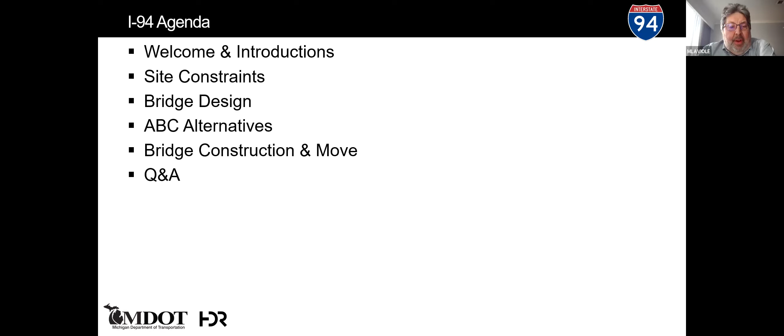I'll talk a little bit about the bridge design itself. It's a network tied arch, and we'll explain a little bit of what that means and why that's important. Matt's going to talk about some of the ABC alternatives, accelerated bridge construction alternatives that we evaluated during the design phase. And then Matt and John are going to collaborate to talk about the bridge construction itself and then the move from the staging area into its final location. And then hopefully we'll have some time for question and answer at the end.

So there's the three of us. I'm the National Bridges and Structures Practice Leader for HDR, and I was also the engineer of record for the 2nd Avenue Bridge. John is the taller gentleman standing next to me in the photo, and Matt's the one who doesn't appear to actually be on the construction site. Not sure why that is. I think he was there a lot more than either John or I, to be honest.

I took all the photos. Exactly, yeah, John was, exactly. Matt was the one taking photos, just like Dad on vacation.

So the I-94 corridor in Detroit is a system that was built in the 50s and 60s. It's in the process of being replaced over time. Some of the bridges have reached a point of deterioration where they simply won't last long enough to survive until the rest of the highway corridor is replaced in the coming years. So MDOT developed what they called an advance bridge program to replace the 8 worst bridges before the rest of the project could move forward.

We did look at the feasibility of using ABC for a number of the projects. And then because this is really a $2 billion or more corridor reconstruction project, they were looking for some type of a signature structure, something that would make sort of a visual statement to kind of highlight the project. And fortunately, the 2nd Avenue Bridge, I think, checked all of those boxes.

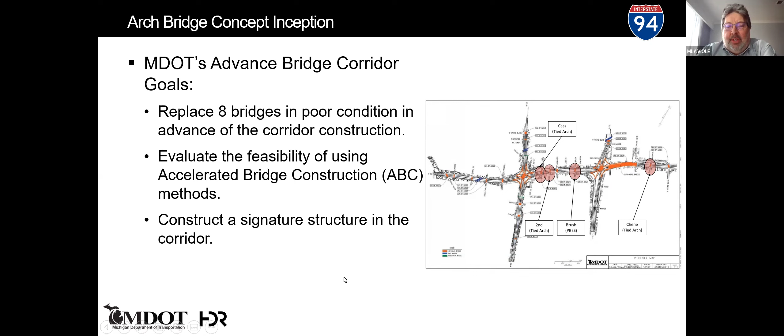When we started the project, MDOT described a couple of the most important goals. Obviously, from a practical standpoint, minimizing traffic impacts to I-94 was vitally important. This is a corridor that carries about 175,000 vehicles a day, and it's one of the main arteries into one of the major cities in North America. So it was very important to minimize traffic impacts.

And they also wanted to minimize the need for any throwaway work, any type of temporary construction that would be built today and then demolished in the future. The reason I say that is in the future, the entire I-94 corridor is going to be widened and shifted about 40 feet north of where it currently is to better suit the alignment. So we looked at a variety of conventional bridge structures at the beginning that would have a pier constructed in the median today, and then shifted to the new median at some point in the future, meaning you'd have to demolish the pier that was just constructed a few years earlier. So that was something that was immediately set aside.

The bridge itself is located right in the middle of the Wayne State University community. So there's students on either side of the highway that need to get back and forth from their living accommodations to campus. It was very important for them to have a safe and attractive pathway to get to campus. I brought in a lot of stakeholder involvement, not only from the university community, but the city of Detroit. Anytime you've got a modern structure, and especially near a university campus, having pedestrian and bicycle access is going to be very important.

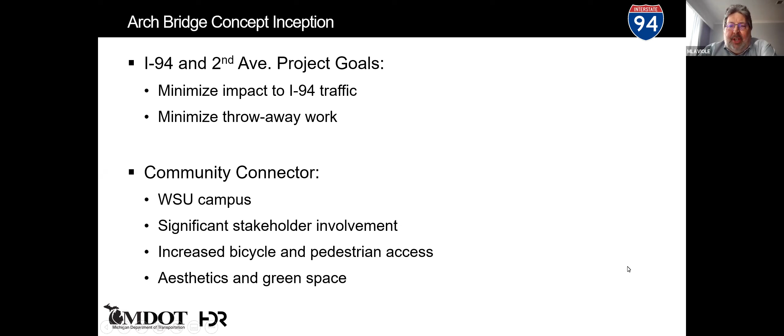And the city was really looking for a park-like type environment. It was almost treated like a park that would happen to carry a few cars and trucks every once in a while. So that's what we were looking for, a somewhat wider structure and something that was open to the sky. They really liked the idea of eliminating lateral bracing between the arch ribs. That had not only an appeal from a visual and an experience standpoint, but it was also very practical, and we'll talk about that in a minute.

So the bridge itself has separated lanes for vehicles, bicycles, and pedestrians on the sidewalk with green space, planter boxes, landscape medians. Like I said, basically a park that happens to carry a few cars once in a while.

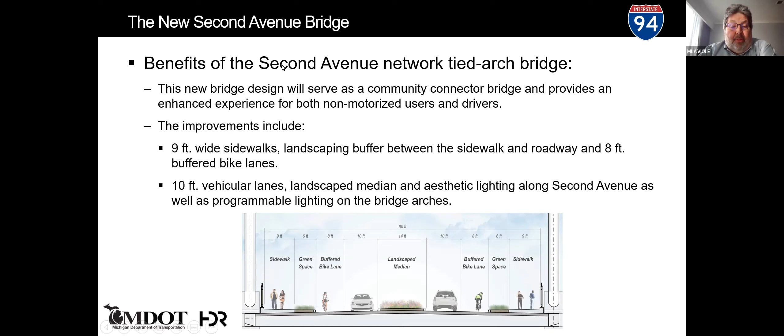I mentioned that the highway is going to be widened in the future. One of the things that we felt was really important was having a clear span bridge that eliminates that center pier altogether. We also needed a way to build a shallower structure that would reduce the need to raise the profile to maintain vertical clearance over I-94.

So that would reduce impacts to the surrounding streets on either end of the bridge. There's a historic property that I'll explain here in just a minute why that's important. And we did look at some ideas for using self-propelled modular transporters to move the bridge into place, and we'll talk about why and how that was done later on.

So an early rendering of the project, you can see the bridge itself, some of the landscaping ideas, and you can compare that to the existing bridge or the original bridge that was there when we started construction. This parking garage to the right-hand side, that's going to be very important, and we'll talk about that too.

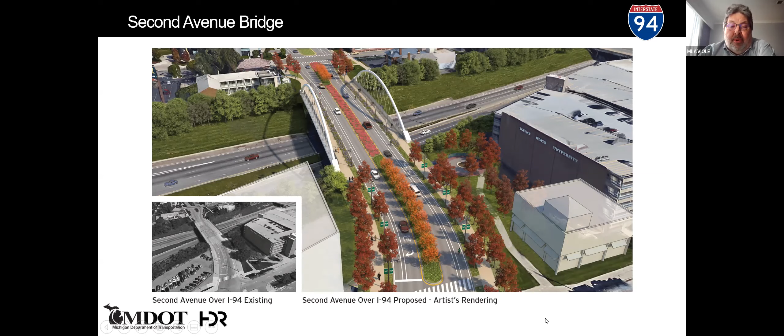This is an old motel that was significant, and then there's a building right here that was a very important historic artifact in the city of Detroit. It's a historic recording studio that was basically the foundations of Motown music. And to the city of Detroit, that is a very, very important historical landmark, and that could not be touched during the design. So that really impacted a lot of the alternatives we had for constructing the bridge.

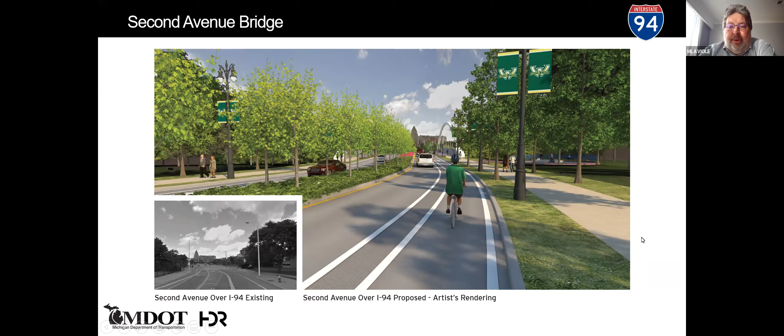As I said, the bridge is a skewed, unbraced network tied arch. So what that means, if you look in plan view, the bridge deck is not a rectangle. It's got two acute corners, two obtuse corners, and the whole idea for skewing the bridge was to accommodate the frontage roads on either end of the bridge and the adjacent properties.

Instead of being vertical hangers, as has traditionally been done with a tied arch bridge, these are crossed diagonally. And there's some real structural advantages to that system, basically providing additional redundancy and stiffness and allowing us to reduce the depth of the structure even more.

And when we talk about a tied arch, what we're saying is that the deck itself serves as a tie. It keeps the ends of the arch ribs from spreading apart laterally as the deck is loaded, as the vehicles pass over the bridge. So that's a big advantage from a structural standpoint.

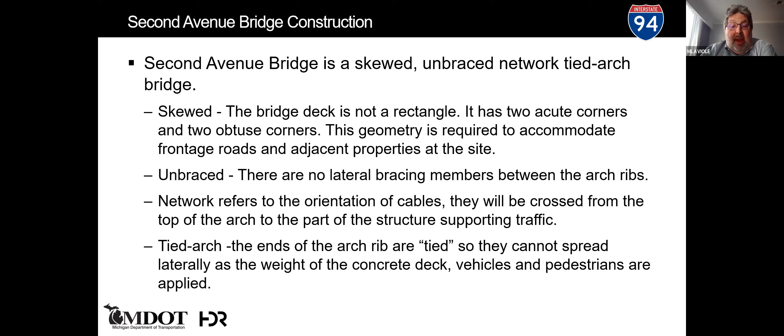But the other thing it does, it allows the entire bridge superstructure to be freestanding. So we can build the bridge in one location, pick it up and move it to another location, and it remains completely rigid and self-supporting.

So the project site, like I said, is in downtown Detroit, with the Wayne State University campus on the lower side of I-94. This is that parking garage I was talking about a minute ago. That historic recording studio, you can see, is right near the corner of the bridge. So that really dictated not only the bridge alignment, but also how the bridge would be constructed.

And the bridge is actually much bigger than the existing corridor, much longer than the existing corridor was. So there really wasn't a great way to build the bridge in place. We looked at different possibilities of building the bridge somewhere else and moving it into place. And really the only feasible place to build the structure is in this parking lot area, what we're calling a staging area. It was a university parking lot.

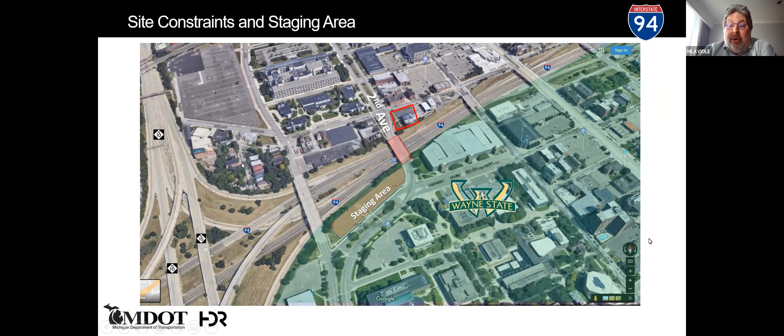Wayne State is largely a commuter school, so there's an awful lot of students that park, and faculty members too, park there during the day.

The I-94 corridor, as I said, was built in the 50s and early 60s. It's a depressed freeway for a large portion of the corridor, with a very low vertical clearance. In our case, about 14.5 feet of vertical clearance over I-94. You can see evidence on the previous bridge of numerous overhead vehicle strikes. And so that was one of the other design considerations, a structure that could be resilient to these types of vehicle strikes and repairable if it was to be struck in the future.

The other challenge to the site is a 3 to 4 foot grade difference between eastbound and westbound I-94. And the reason that's important is if you're thinking about trying to roll the bridge across from one side of the freeway to the other, now you have to do something to accommodate that elevation difference.

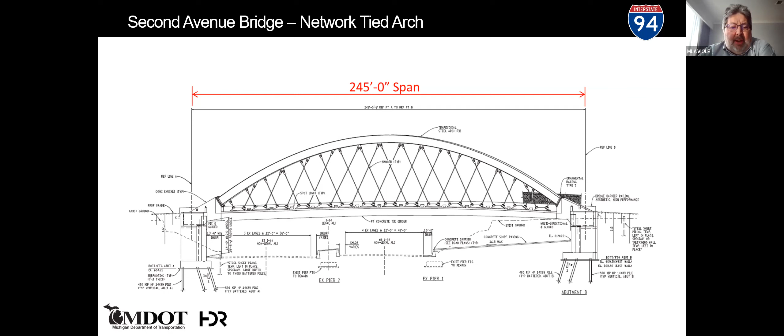So the solution we came up with is a 245-foot span network tied arch. You can see the diagonal hangers, indicating a network type structure. The tie itself is not just the deck, it's the post-tension concrete tie girders that connect the two ends of the arch ribs together.

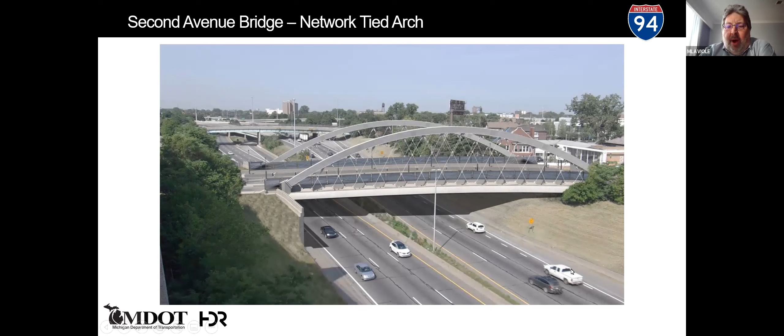That's a rendering of the bridge prior to construction, and you can see why it looks a little bit longer than would make sense for the current alignment of the freeway. That's all because of the future widening and alignment shift that'll take place down the road.

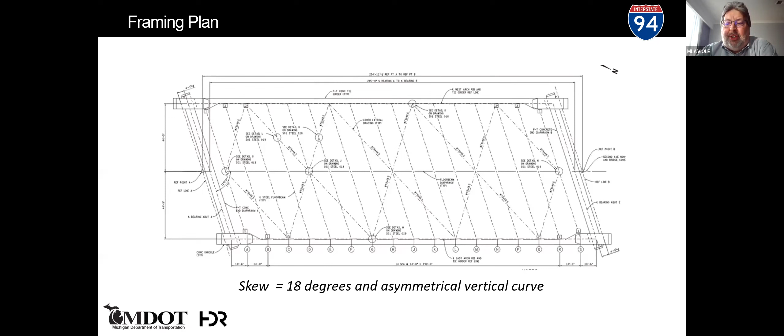Skewed 18 degrees. That in itself is not a big challenge for a conventional bridge, but it does complicate the details quite a bit for a tied arch type structure. The other thing we had was an asymmetrical vertical curve, meaning every single floor beam on the structure had to be slightly different, because the skew and the vertical curve worked together so that all the elevations were different from one side of each floor beam to the other.

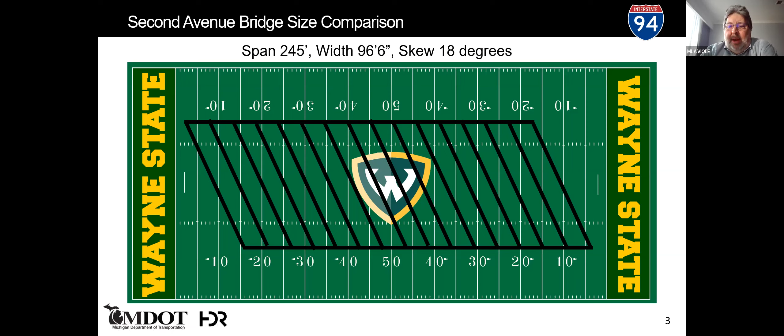Just to give you a sense of how big the bridge is, here it is overlaid on top of a football field, roughly 2/3 the size of a football field. It's always easier to recognize the scale of these types of projects when you can lay it on something to compare it to size-wise.

So why is a network arch such an improvement over a conventional tied arch? It's much more efficient than a traditional tied arch bridge. The incline hangers really reduce the moment and shear forces in both the tie girder and the arch rib.

That allows us to make the hangers, the tie girder, and the arch ribs much, much smaller, more efficient, and quite honestly, more visually attractive as well. They also provide additional redundancy to the overall system.

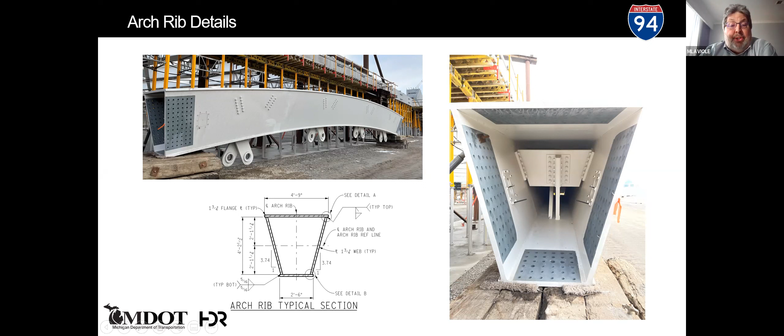The hangers themselves are 3 1/8 inch diameter structural strand, galvanized. Initially, we looked at galvanizing the entire structure during the design phase. After some testing at MDOT headquarters in their materials lab, we decided it was actually better to go with a very reliable and predictable paint system.

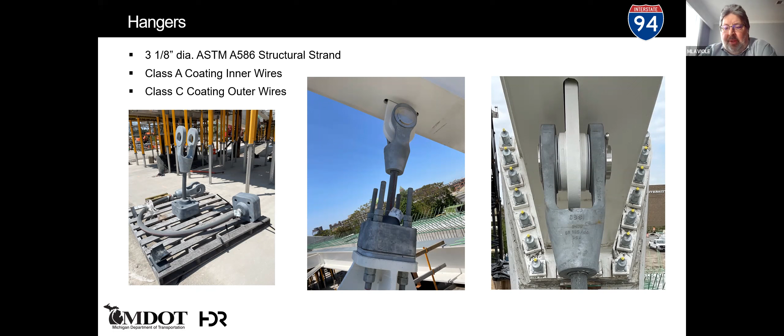We had some concerns about the potential for bolts and those internal components being loosened by the hot dip galvanizing process. So at that point, we just went with a painted system that everyone was comfortable with, and that MDOT had used with great success in the past.

As I said, the post-tensioning system, both the tie girders and the end diaphragms are made with post-tension concrete. Really, the only reason those arch ribs can remain vertical without lateral bracing between them is the post-tension end diaphragms. That's where that lateral stiffness comes from in the system.

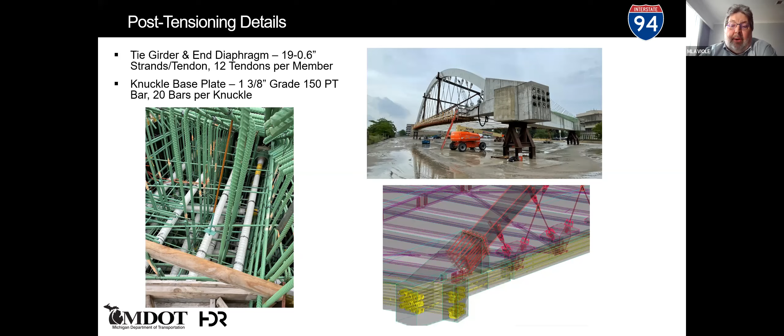All right, and with that, I'm going to pass it over to Matt to talk about the construction process.

All right, well, thank you, Mike. Here, I'm just going to get this up.

So as you can imagine, very complicated bridge. The construction engineering is a very significant part of the project. So let's talk a little bit about that. This happened during the design phase as well, but it all ties together.

Just some of the ABC alternatives that were considered. Building it off site and being above the freeway, above grade, really made sense to do an SPMT move. So we looked at doing three different options: you build the whole superstructure, move the whole thing into place all at once, deck, all the superimposed dead load.

The downside is that it makes it really heavy. So kind of the in between there is you could build a skeleton, and this is what we ended up doing. Get the floor beams, arch rib, tie girder, diaphragm, not the deck, and then move that, and really just kind of help save the weight.

Or there was another kind of out of left field idea, trying to do panels where you could do one arch and rib and tie girder segment, and not do the other, and then bring in the floor system and things. Didn't end up going that way.

And I should probably take a step back too. All these were using SPMTs, and for those who don't know, it rolls right off the tongue for us - self-propelled modular transporters. They're more or less a bunch of linked hydraulic axles. They can move incredibly large amounts of weight. These things get used all over the world for some really unique projects, not just in the transportation industry, but other industries as well.

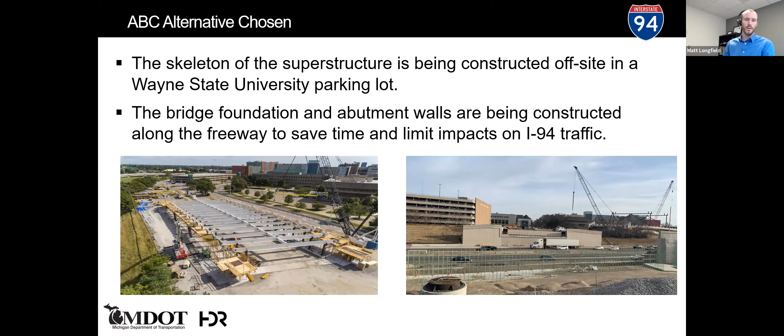Now, obviously, any signature bridge, as you can imagine, sometimes in the life and times of a bridge, as one of my professors used to say, the most critical time in that life is early on in construction. Depending on the configuration and how things go, that could be the most critical load that bridge will ever see. So certainly something that wanted to be accounted for during the design.

And how are you going to do this? This is pretty unique work. So to not be that engineer who thinks they know everything about construction, there was a lot of one-on-one confidential meetings with the different heavy movers around the country and the world, really. Just to see how they would do it - how would they pick up the structure, where would they pick it up - those types of questions.

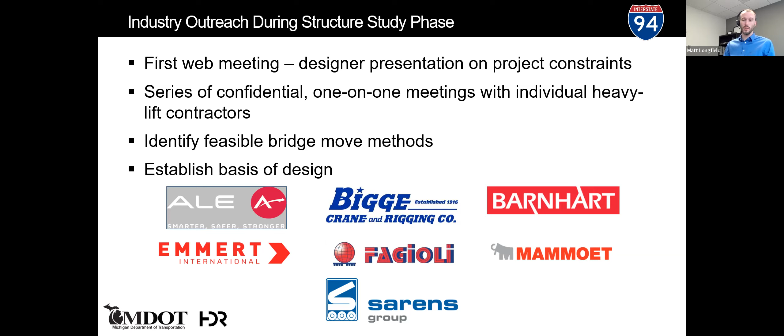And a scheme was come up with during the design phase that at least two of each of the movers could do, just to make sure that the bids would stay competitive. And then this was used to estimate any locked-in stresses from the construction phase.

So this sequence that was come up with during the design phase involved picking up the arch, the whole superstructure skeleton, from the arch itself, kind of inboard of the knuckles. They used temporary end diaphragms in this configuration to keep the weight down, and it would pick it up - called that the handbag configuration - and then at that point drive it over to I-94, where it could just be set down onto a tower that would be supported by other SPMTs to then carry it the rest of the way across the freeway.

And because this was not maybe the most ideal way to lift up a structure, it did drive a lot of the permanent geometry, particularly just trying to keep the member sizes as small as possible, really just trying to keep that weight down. Of course, knowing that the contractor could likely come up with another way to do this, a very detailed special provision was developed requiring the contractor to have an erection engineer and their own analysis and procedures, really backing up everything that they'd proposed to do.

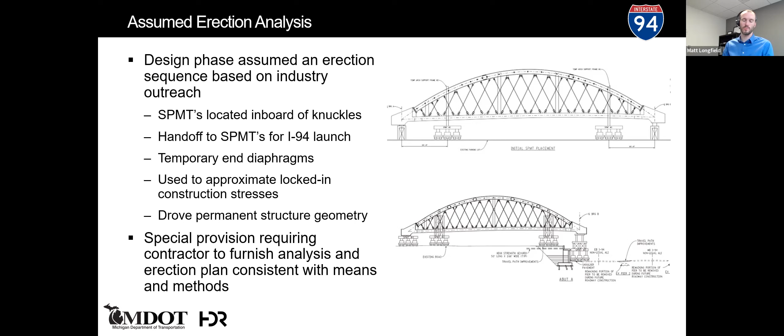And kind of as expected, they came up with something a little different, not terribly different, but a little different. The main change really came from: they didn't want to support the superstructure off of the arch, but they wanted to pick it up right underneath the knuckle, right under the centerline bearings for the permanent condition, which structurally that's great. It actually even allowed those end diaphragms to get poured ahead of time, which is good for minimizing impacts to traffic on I-94.

Really, I'd say the complication of this method came from how do you make that handoff? Now, you guys can see my mouse pointer here - if you look right here in this picture, this is called the skid shoe that Mammoet uses. And basically what they ended up having to do when they drove the bridge up to the freeway, they then had to slide it, or skid it, on a track over the abutment to pass it on to the tower supported by SPMTs on I-94.

To then drive the rest of the way across, and then skid it again one more time back onto the abutments before it could be lowered. So for those playing the accelerated bridge construction game at home, not only did we have an SPMT move, but we also had a slide.

So we're claiming some bonus points on that one.

One thing I like to note too is the erection plans, calculations, and all the information that went into this procedure was about 1,700 pages. Anyone who's run structural software knows, oh, that's nothing, I can print out 5,000 pages out of Larsa, no big deal. But this was actually 1,700 pages of the pared down version. This was all very relevant information that had to get reviewed, not just pages and pages of computer output. So it was quite an effort to do that.

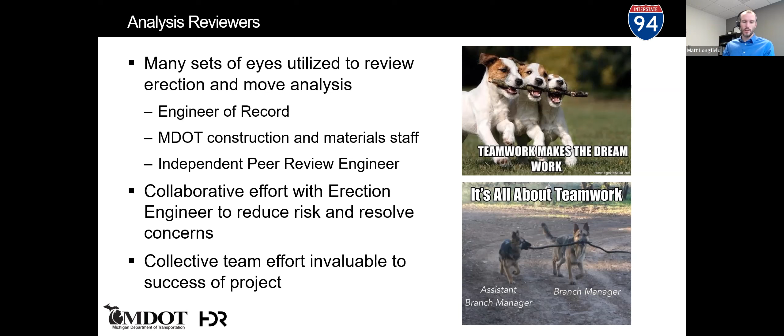And in order to do that, it took more than one person, obviously. HDR was the engineer of record for the superstructure, and we were very involved in reviewing it. MDOT and their different construction and material staff were also very involved. And there actually was an independent peer review engineer, Parsons, brought on. I'll give them a lot of credit, they did a great job helping everyone out, bringing some good outside perspective to the project. Everyone worked together with the erection engineer to really sort everything out. If anyone had a question or thought they saw any risk, we got everyone on the phone and talked about it. A lot of smart people on the team's call, I guess you could say. But the teamwork really was invaluable. We may have sung Kumbaya once or twice, but it really was a highlight of the project, and just from a career standpoint, getting to work with some top-notch engineers from several different places.

As part of this, in construction we developed 3 independent finite element models between HDR, Jansen as the erection engineer, and Parsons as the QA engineer. The HDR one, obviously we had from the design phase, which we then updated for the contractor's means and methods. And we had regular team meetings to hash out differences in the modeling and just compare notes.

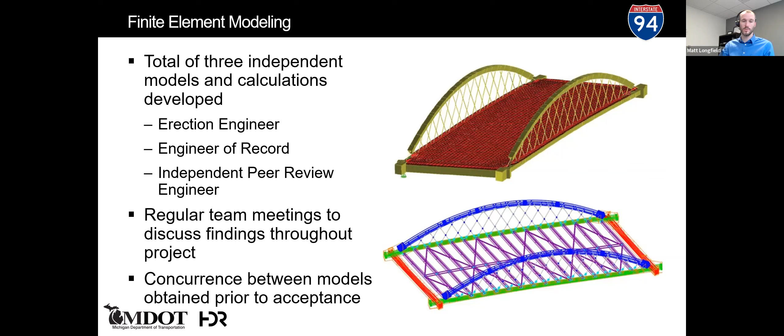There was discussion too about the technique, like where did you put that imperfection in your arch to get it to buckle, or the knuckles, how did you model the knuckles? That was a lot of conversation, actually. Did you use one massive, really stiff concrete member, or did you use some smaller but still stiff concrete members connected by rigid links? Everyone being engineers kind of went their own way with it, but at the end of the day, there was concurrence between all 3 models that the bridge was going to be okay. And that gave the warm and fuzzies to a lot of people on the team, knowing everyone came to that same conclusion.

To be engineers and continue to cross the T's and dot the I's, prior to the move we wanted this thing planned out to the letter. There's another document, not quite as long as that first one, but really detailed everything about the move and the procedure, each step by step. Who's the superintendent and operators on site for the contractor, here's their phone number so you can call them, drawings, calculations, a lot of detail on a monitoring plan, which I'm going to talk about on the next slide. We even all got together 1 month ahead of time at the Detroit TSC, their regional office in that area, and really walked it through, who's going to do what, how's this going to happen. It was really valuable because we did shake out some loose ends during that meeting, and it took all day, it wasn't a 1-hour call.

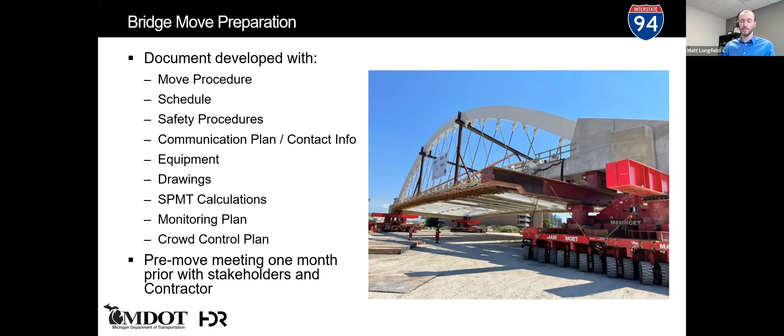One thing I do like to mention too, in terms of accelerated bridge construction, very early on in the construction phase, the contractor did have a VECP concept that they wanted. It ultimately was not accepted, though it's worth mentioning because it was a really good example of some outside the box thinking. Instead of doing the move, they wanted to build the bridge superstructure in place over I-94. However, to avoid the traffic impacts, particularly forming and curing that tie girder, they wanted to use precast segments and post-tension them together. Ultimately this was not accepted, it was a lot of redesign and a lot of shifting of liability and risk to the contractor and away from MDOT and HDR as engineer of record. But again, it was a neat concept. Theoretically speaking, and it didn't get vetted all the way through, but it would have been about the same week-long closures on I-94 that it also took to do the move.

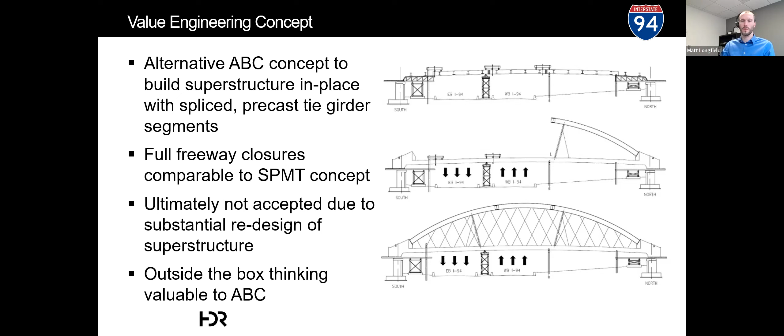I want to also touch on the monitoring during the move. This was a very critical thing. We've got a several million dollar bridge, 5 million pounds, and we're going to move it. We really want to make sure we don't break it. That'd just be bad for everyone involved.

It was agreed through the whole project team that the worst thing that could possibly happen to this bridge is that one corner would get out of plane relative to the other corners, whether the hydraulics failed and it settled, or it went over a bump or something. That twisting of the superstructure is really what we were trying to avoid doing.

The bridge was designed for up to 3 inches of out of plane movement at any one of those corners, and things would be okay. So as part of the monitoring, they established what I call green, yellow, red light values. Relative to that settlement or out of plane movement on any corner, 3 inches would have been the red light - all stop, we've got to make an adjustment.

2 inches was that yellow light - you're getting close, you probably should make an adjustment at this point. Based on those limits, we also, out of the models, were able to check not just the 2 corners, but if you took that model and dropped one of them, saw how the structure deflected - that's how the relative distance measurements between the nodes were developed.

All right, there we go. Can you hear me, Matt? All right, you're muted, but I saw your lips move, and I'm assuming we're on the right screen now. Yeah, looks good, John. All right, good afternoon, guys.

So yeah, we're going to walk through the construction process. We're going to keep it pretty limited on the overall construction process, as it ended up taking us 3 years, which is 2 years longer than we anticipated. Our therapists have said it's best not to talk about it to make us feel better about ourselves.

So we're going to just get into construction. This is early on in the construction phase, but the first question is, what do you do with a 5 million pound structure in a parking lot? Because it clearly can't sit on grade, and at some point we have to be able to get underneath it with SPMTs. So the first stage here was to put in basically temporary abutments.

Each of those A-frames in the 4 corners under the knuckles are sitting on driven pile. The rest of those supports are actually for the floor beams, and those are just sitting on reinforced concrete slab.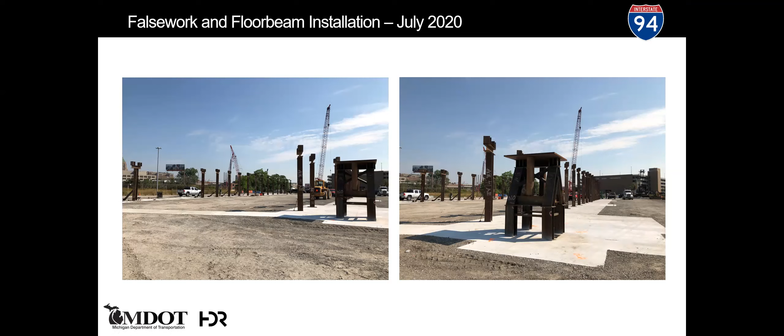One of the trademarks of this project is every step of the way something was a hiccup. These beams arrived on site before we realized each of those hanger plates, that's supposed to be at a very unique special angle due to the geometry of the bridge and the angle of the hangers coming in, was actually wrong.

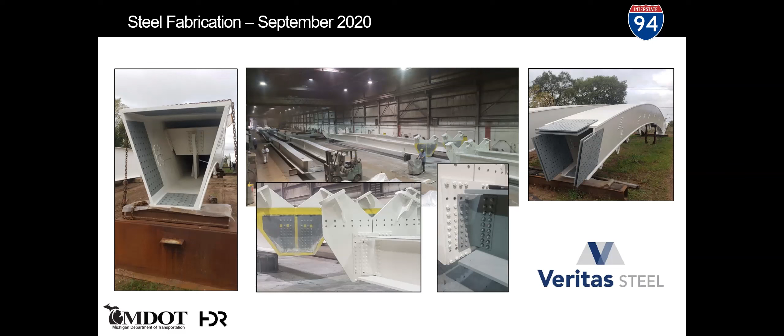They were all fabricated on a flat surface, and so all but a couple of the beams actually had to make a trip back to Wisconsin to have all those bent plates there that you can see in the lower picture in the middle. The connector plates all had to be rebent, and everything had to be reshaped and then sent back to Michigan to get re-erected.

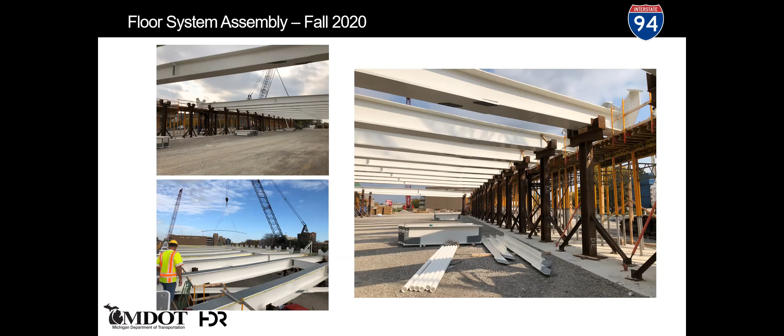So basically a bunch of really custom oak wood blocks. Obviously, one of the big things we learned going into this project was that 8,000 PSI mass pour concrete that had to act like self-consolidating concrete, but couldn't be self-consolidating, was going to give us a bit of a headache. So we decided to put a mock-up in the plans.

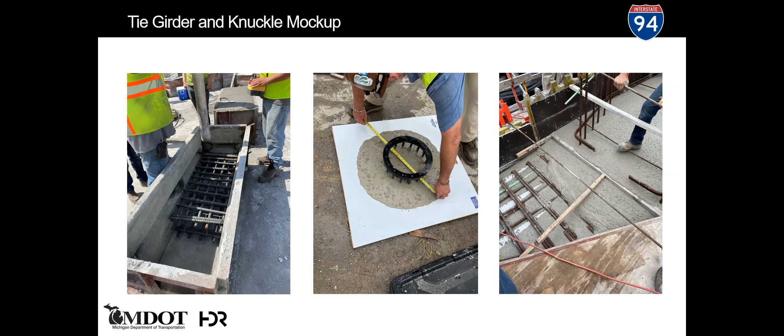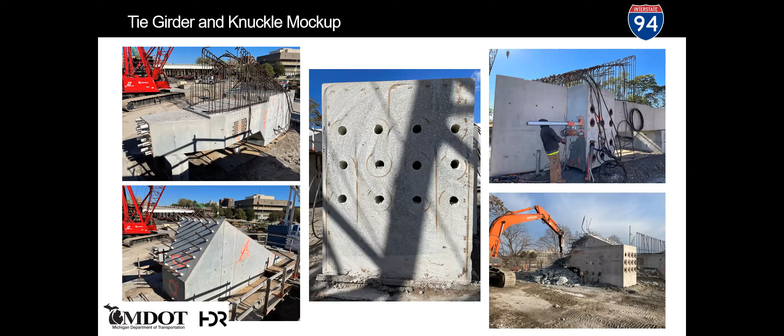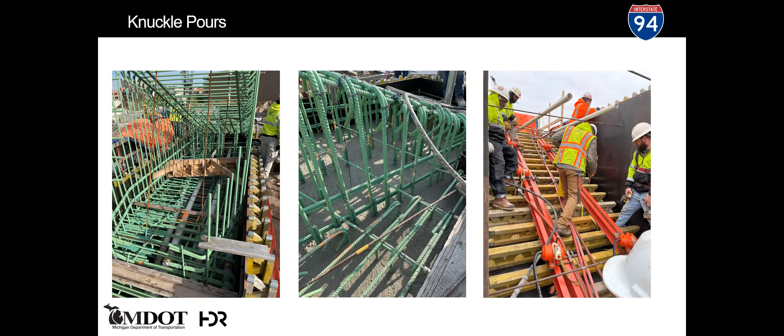So we ended up using a fabric material that our project down the road at the Gordie Howe International Bridge had found to help them with their slope faces. It basically wicks the water away from the surface, which gave us a better finish. We were able to successfully finish 3 of the 4 knuckles. We still had problems with one of them with a blowout, so we had to do some significant grinding and patching on that one.

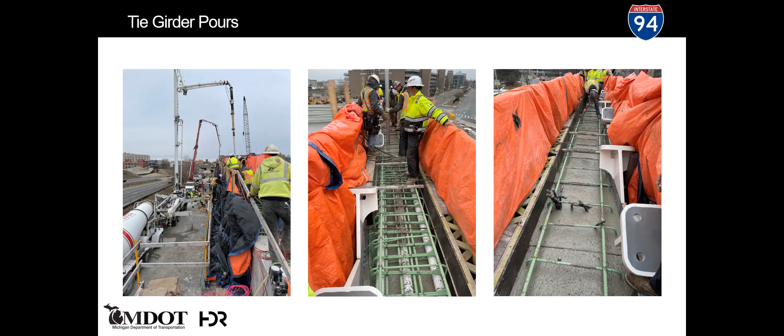We ended up taking the paint right off the top of the arch as it started to slip at about 16 feet off the ground. So we convened. We had a lot of billable hours for a lot of really smart engineers, and after thousands of dollars in engineering fees, we came up with a couple hundred dollar green strap and a bottle jack. And ta-da, we have positive connection, and now we can erect the arch without it slipping through our hangers.

Obviously, then we have to set the crown pieces. Again, because of our tight spacing, we really could have used a third crane to manipulate this process, and unfortunately we only had room for two. So it became yet another unique step in the process that took way longer than we probably should have. But we really did manage to get that crown piece in place.

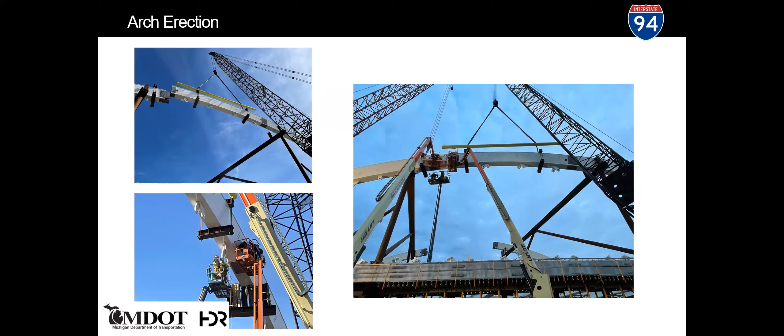As Matt showed you that arch earlier, there is no room for a person to get through there, but yet someone did. I don't know where they found this gentleman, but he managed to squeeze through there to get inside to work on some stuff, and then crawled his way back out of the crown piece. So kudos to him.

Here we are setting the last of the two crown pieces. As you can see from that parking structure Mike pointed out, we get some great photos from up there. The bridge is in place, the arches are in place.

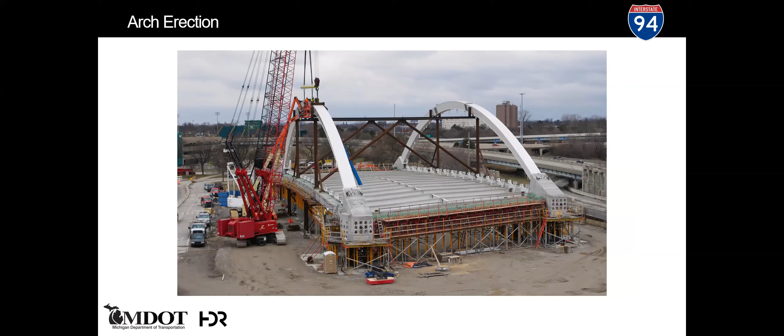We have one duct at this point in each tie girder post-tensioned to compensate for the load applied by the arch. But now we're going to have to go ahead and post-tension the rest of stage one so that we can get those tie girders to take off and the hangers to fit.

So we went into post-tensioning here. The original design had 12 ducts, 6 for load, 6 for potential future usage if we had an impact of some sort or something like that. Unfortunately, we turned this bridge into 90 feet wide for 20 feet of roadway with 2 raised sidewalks, 2 bike paths, 3 raised planter boxes, and a partridge in a pear tree. At the end of the day, we ended up using all 12 ducts. So the remaining 5 ducts of stage one were done.

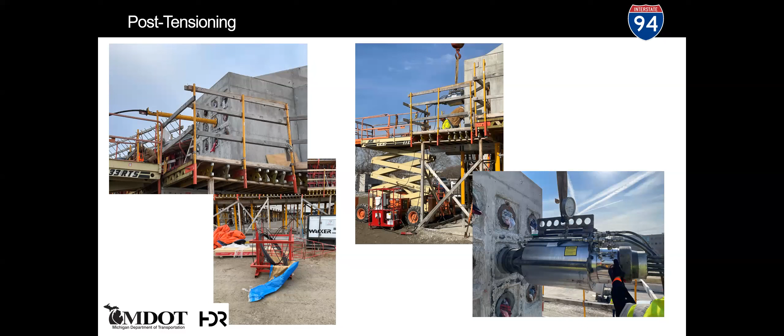We actually did another mock-up here. It's quite common, if you haven't done any large-scale post-tensioning, to do a mock-up, and a lot of contractors try to talk their way out of it because it's not needed, we're really good. Luckily, the department stuck to our guns and insisted they do the mock-up there on the left, and it paid off because we found some possible places we needed to check, and we were able to change the process for burping and all that of each of the ducts to get it to consolidate correctly. In the middle you can see the grout mixers, and on the right are some of the tests we're running and overflow to make sure we get all the air out of the ducts.

All right, so then comes hanger installation. Each of these hangers, if I remember correctly, the upper socket is just under 400 pounds, the lower socket is just under 500 pounds, and the cable weighs in at 20 pounds per lineal foot.

So even the really short one wasn't exactly maneuverable, so we had to bring in the contractor. CBSI did a fantastic job. They came up with these custom Cs on the left, you see, to allow the crane to reach around the arch to start installing the cables.

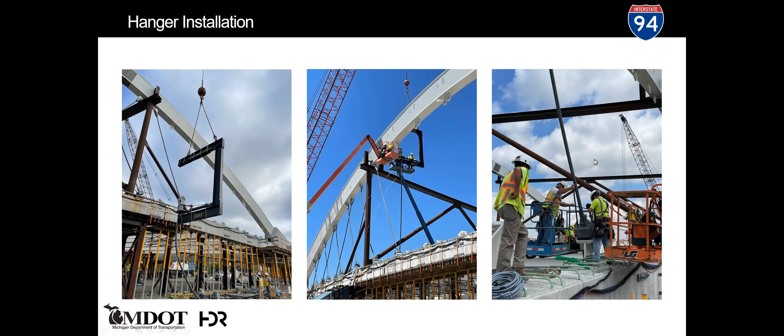It took us a couple of weeks to get them all in. But once they're in, it's time to actually get them to fit and put the load in them. We needed an initial load of 120 kips per cable, so we got 2 60-ton jacks right there on the 2 opposite corners. You can see us putting in shim stacks there.

A valuable lesson we learned here is your lower hanger needs to be milled, not cast, so it's a nice smooth surface. And honestly, if you hot dip galvanize 1/8 inch and 16th inch shims, you're going to end up with potato chips that just don't fit in straight. So we had a lot of hand custom making of shims. There were some very colorful words used, and just a good old time for a few weeks of fighting to get each and every one of these right where we wanted it.

To make matters even worse, the bridge has to stay balanced the entire time. So we had 2 crews. Matt and I were basically running one side with the foreman on the other side of the structure, working in tandem and making sure nobody got too far ahead of each other, working to get the initial spacing needed per the construction engineer's calculations.

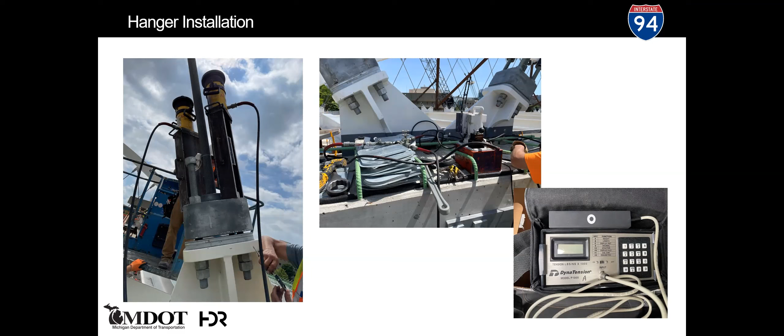So good times, this was a lot more fun. This picture here is in June and July. It's way more fun to do this in June and July than when we did the post verification, which took place in December. And in Michigan, December is not pretty.

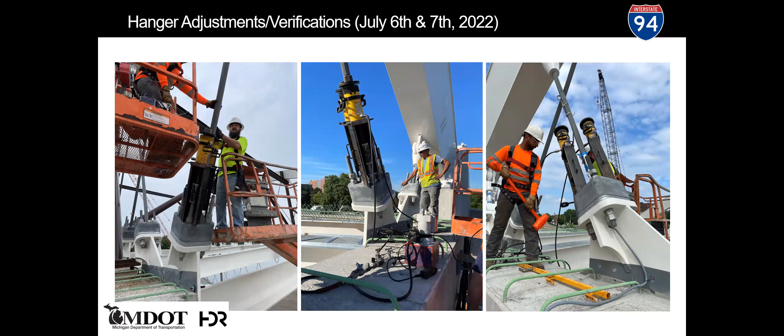So here's the main three guys that did all the yeoman's work on this. On the left is Greg, our carpenter. In the middle is our foreman, Pat. And on the right is our laborer, Diego, who right after this job was finished decided to join HNTB as a construction inspector, because I think he'd had enough building bridges.

All right, so let's get to the move, the good part. On July 6th through the 8th, we were finishing up the hangers, and the contractor said over the course of a week, 77 semis were going to arrive with equipment. Unfortunately, they all converged on downtown Detroit the same day, which obviously is not great for Detroit traffic or our project site, but we had to shuffle through it. It took us 3 days to shuffle through 77 semis worth of equipment just to move the bridge.

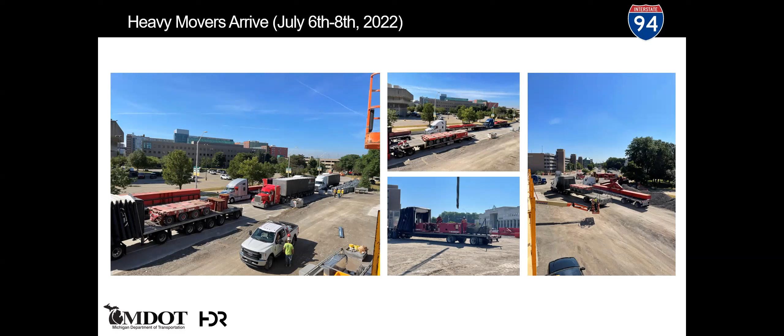So first process in the move is these A-frames, these temporary abutments that have been in place for 3 years, and we need to park an SPMT right where they're at. So how do we get that out of there to the picture on the right where we just set it next to the dumpster to be recycled?

Well, that's where these carrier beams that Matt showed you earlier come into play. They allow us to put the load front and back of the knuckle, and then using walking jacks on the side, we can lift the structure. It actually had to be elevated 16 feet in the air to be able to get the SPMTs under it. And we're obviously not at that height yet, so how do we do that?

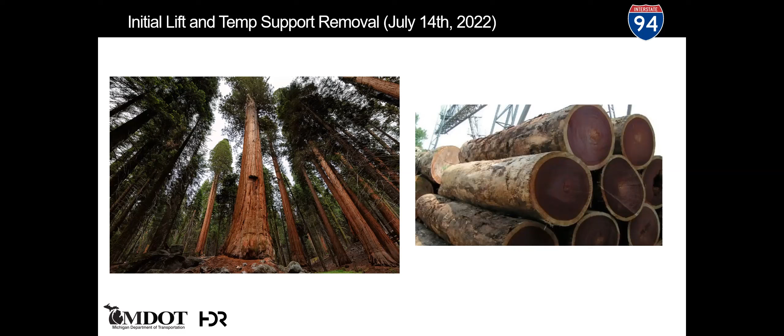Trees, lots and lots of trees. This is African azobe wood. It's considered an endangered species now, not at the time the blocks were made. It can handle, I believe, 17 tons per square inch. And they store it in oil to help it stay preserved, because as an endangered species, they're not going to be able to go get more of it anytime soon.

This is what it looks like when it arrives on our job site. I believe we ended up having maybe 2.5 flatbed semis full of those crates for all the blocks, because each corner needed a significant amount of lumber.

You can actually tell from the Jenga blocks on the right, the darker ones with the red ends, that's the African azobe. The other ones are a new material they're using, a bamboo epoxy hybrid, the green lighter colored ones.

They kept telling us not to touch the azobe without gloves on. I asked if the wood was really that hard to get a splinter out of, and their answer was no. The chemicals we stored it in to keep it preserved will kill you if you get it in your skin before we can get you to the hospital. So you probably don't want that stuff in your body.

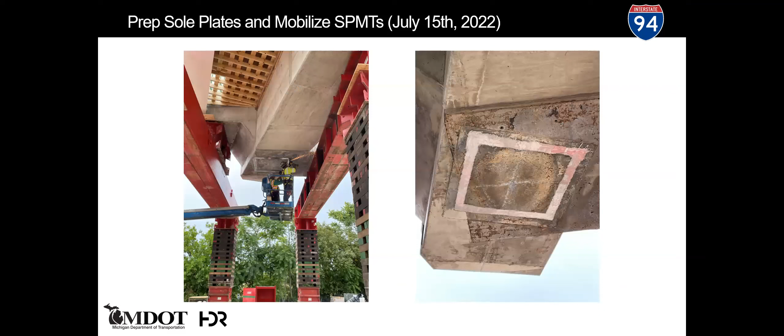Once we got them up in the air, we got the A-frames cut out. It dawned on us this is the first time we've seen the sole plates in 3 years, and the last time we're going to see them with any room to work on them ever again. So the contractor decided to take this opportunity to grind off the galvanizing so we could weld the bearings in place. Again, everything on a structure of this size is multiplied in time.

Contractor thought it'd be an hour for their crew to take all 4 plates out, and after a few hours on the first plate, they still had 11 mils of galvanizing to get rid of. So we were there for an entire day with multiple crews just to get that small area ground out.

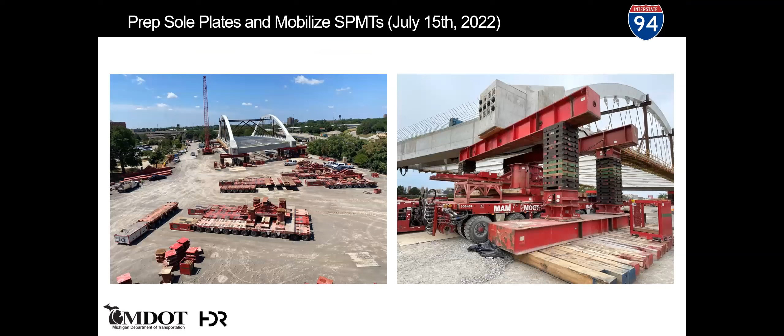Here we are on the 15th. We are now ready, and the SPMTs are to pull in there.

This is just a great picture from that parking structure. During the initial design, original estimates for the weight of the structure called for probably 80 lines of SPMTs. By the time we got the numbers refined, we were up to 96. At the end of the day, for stability and things like that, we ended up using 120 lines of SPMTs, which means Mammoet was the only company in North America that could actually handle this work without having to borrow equipment from other contractors. That tells you the sheer magnitude of what we were doing here.

So there you can see all the SPMTs getting assembled at that point. It's just a great picture to show you how much equipment we needed. On the right, you can see them pulling into each of the 4 corners, preparing to be loaded.

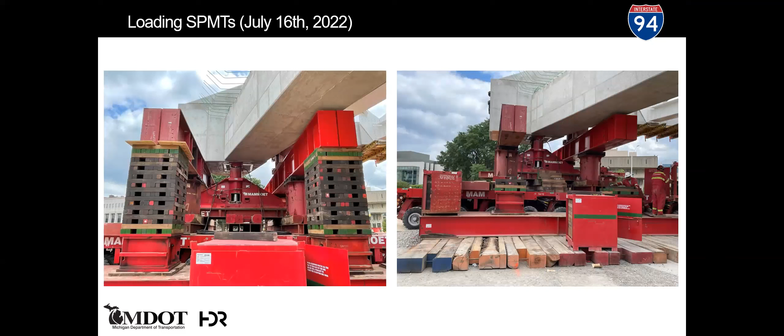So on the 16th, this is when we loaded the SPMTs. We actually began to play Jenga in reverse and slowly walked them down until they were loaded on each of the shoes.

Now, technically, each shoe has enough force in the 2 jacks inside of it to actually handle each corner on their own. However, we did have a stability question come up during design: is the shoe going to be able to handle the amount of force implied on it for braking, and also stability making the turn to the abutment? Eddie He from Parsons, a very brilliant man, asked a very brilliant question, and the response we got from the contractor when we asked how the shoe works was, 'it just does.' As you can imagine, engineers, 'it just does' is not really a calculatable answer.

So once again we compiled a group of engineers and came up with the idea of the carrier beams. These carrier beams were no longer just for the initial lift, they were going to make the ride with us. At which point we then figured we better get them tied down.

So on the 16th, we spent the rest of the day putting on chains, come-alongs, pulleys. I think we went and got every chain in the Metro Detroit area to tie this together to make it as stout as possible. We also had to realize that the rear carrier beams on the front abutments, the north abutments or north knuckles, were not going to be able to make the trip or be removed and replaced. They were going to have to make the trip with the bridge.

So the picture on the right, there we are with chains and pulleys, and we are actually anchoring those to the knuckles so that they can make the transfer with the bridge.

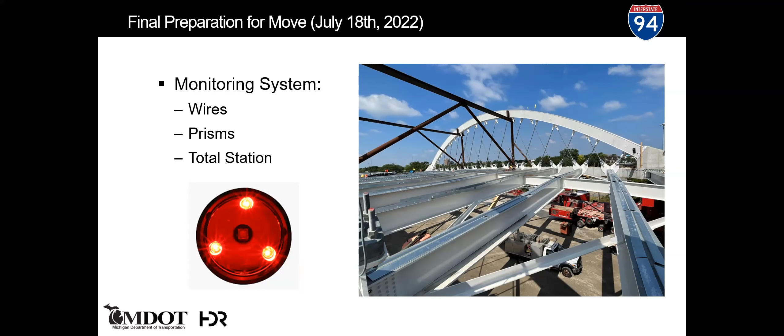So Matt brought up the monitoring system. As you can see in the picture on the right, believe it or not, that monitoring system is fully installed. And if you're asking yourself, I don't see any wires, well neither did we, and that's why we tripped over them and broke them quite a few times. But most importantly is that little red light. That little red light had more billable hours during the move than anything else, as a group of grown men and women, engineers from some of the most intelligent in the entire country, spent the entire move staring up like turkeys looking into the rain, waiting for the little red light to go off, where we all screamed, stop.

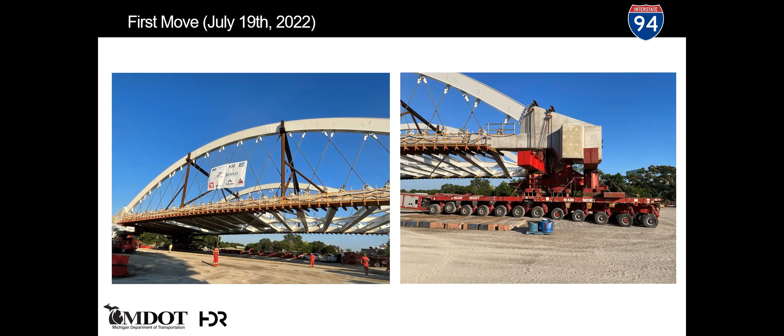So the first move began on July 19th. Now moving a 5 million pound bridge is just another day at the old work site. But for the entire Michigan Department of Transportation and all of our consultants and contractors and the people who've seen this thing sitting there for multiple years, wondering when it was ever going to move, we were very, very excited. We were so excited that we have multiple pictures of the giant rat that ran out of the equipment when we fired up the power packs. We're not sure which state that rat made its move in here from, but we now have a new resident in the city of Detroit.

So the first move is obviously going to go down, and then we have to turn about almost 90 degrees to face up with the abutment for 94. It was at this point we realized to get those front carrier beams off, we needed room for a crane, and our work site bridge staging area wasn't big enough. At the last minute, we had a geotech say, well let's just pile gravel on the grass until it can't take it anymore, that should hold the end of your bridge. We, again as engineers, said maybe we should take out the topsoil of the grass, we'll throw some geotextile, some stone, and some crane mats down and give us some room to back up that SPMT. So that's exactly what we did here.

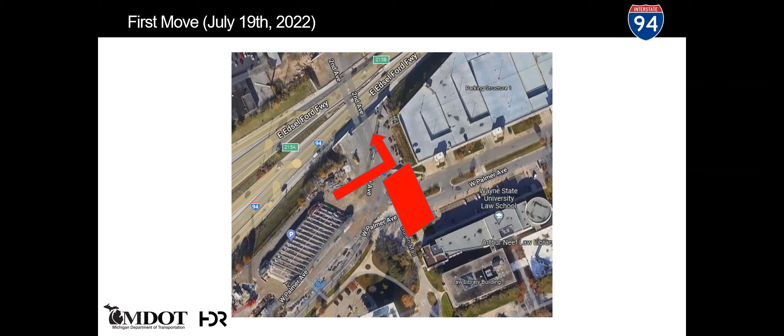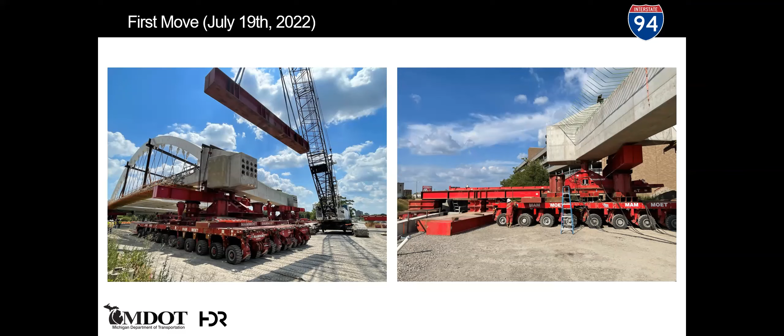So here's the crane coming to the front. We're going to pull those front carrier beams off, and then we pulled up to the abutment on the right. You can see the picture where the slide rail system is waiting to transfer the skid shoe from the front SPMTs to the south abutment, and that's exactly what we had to do. So we had to wait for our closure time, which is the following Monday. We closed on Sunday and started putting down stone.

And so on the 23rd, we begin the initial handoff. Everyone wants to take pictures of the 5 million pound skeleton crawling across the parking lot, but ask any of the engineers that know what's going on, this is the most nerve-wracking part, handing this thing off from an SPMT onto an abutment. It's not only just a slide, it is one of the most unique slides you will ever see in bridge movement. So very complicated, multiple crews.

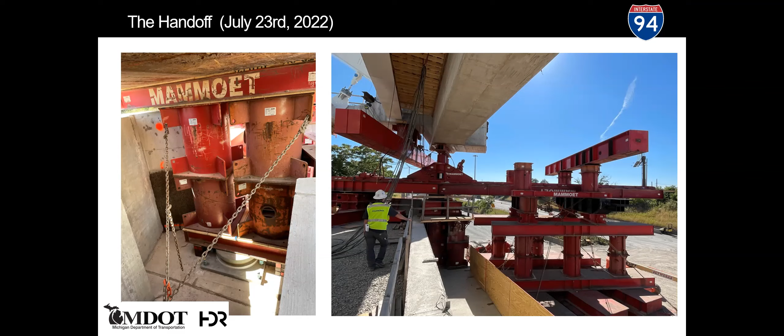And of course it's skewed, nothing else - all these blocks are square, but the bridge is skewed and at weird angles. So basically the shoes did not make their transfer at the exact same time. There's a lot of stopping and shimming, and I mean you're not shimming with a small shim, we're shimming with giant steel, half-inch road plate type things to get everything lined up. It took us an entire day to transfer to the 34-foot tall towers on SPMTs down on the freeway below. Those are your front SPMTs that were disassembled and moved down over the weekend.

So now all that, an entire day just to get us into what you see on the left and on the right there. The rest of the day was spent with, as you can see, all the chains and come-alongs, all the control lines for the different hydraulics, all of the monitoring systems. Everything had to be basically replaced and set on there and reinstalled. The beams, the carrier beams that made the transfer with the bridge had to be reinstalled. So just an entire day of working on that kind of stuff.

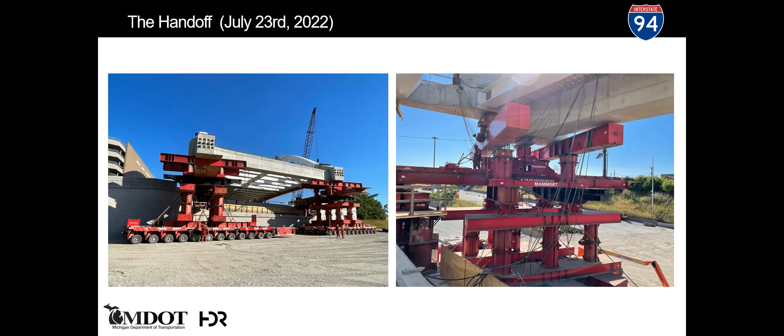That night, the state of Michigan—our weather here is well known for being temperamental—decided, out of nowhere, to dump enough water to flood parts of I-94.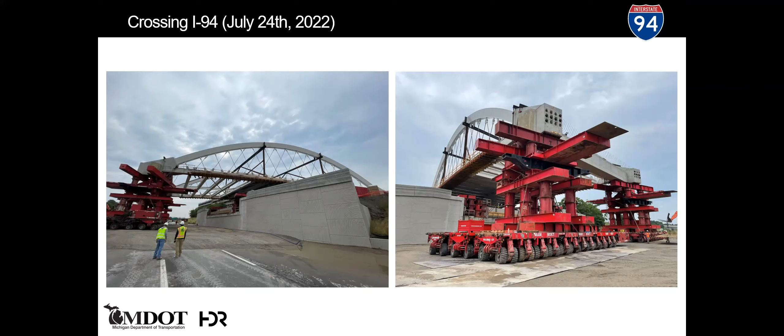So now we've added another level of difficulty. We have half of our bridge 34 feet in the air, and it absolutely has to move today. Now we have to road plate the entire process, and of course we didn't have nearly enough road plates. So we're going to have to play hopscotch with road plates while we worry about our bridge 34 feet in the air.

Here's some great pictures of that move as we come across I-94. You can see the road plates and the loader down below moving them around, with lots of stopping and going. On the right, you can see the rear SPMTs still just hanging out behind the south abutment, waiting to do their jobs.

On the 25th, we were ready to do the second transfer, or handoff. This is complicated because of the skew, the angles, and the unique geometry of each of the knuckles. With each stroke of the jack, the loading condition changed for one of the four corners. So we're not just transferring the two north knuckles at the same time, or all four at the same time—with each stroke of the jack, one of the four corners was shimming, yelling, changing, calling out orders to each other.

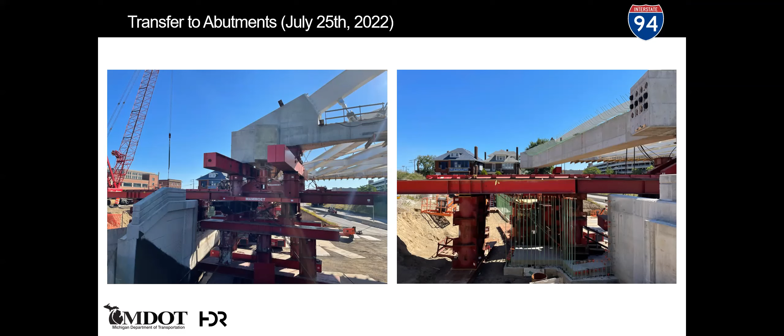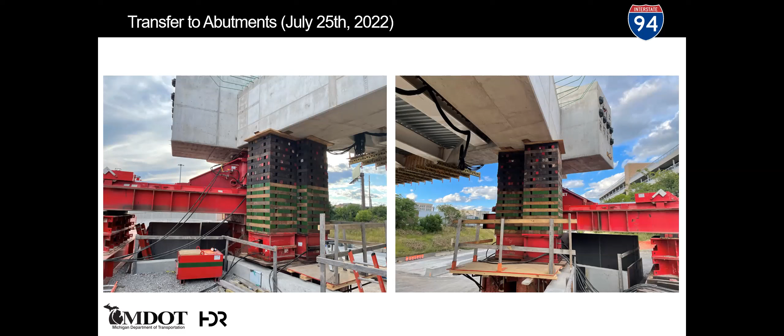It's a very long process, but again, the handoffs are the most unique part of the job. We handed this one off onto the abutments on the 25th, then had to lift it off the SPMTs so we could pull them out. So our Jenga blocks and walking jacks are back—we set everything up again, braced off the abutments, with jack stands on the abutments themselves.

On the 26th, we were able to pull out the SPMTs and begin the lowering process. Now this is where it gets fun again. The initial design had plenty of room as far as the engineers were concerned for spatial issues, but the walking jacks available for the size we needed wouldn't fit.

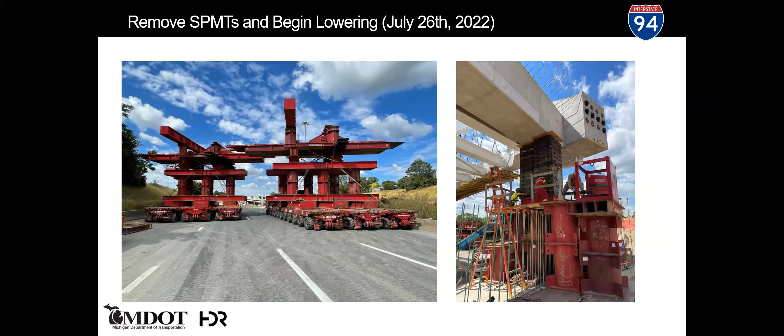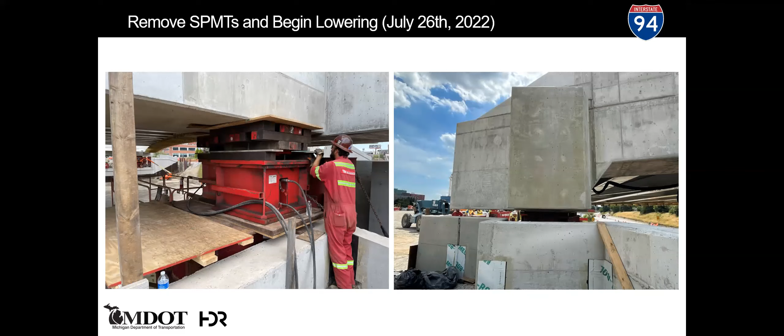So as we're doing this, we're still trying to figure out how to make the final transfer as we get closer to the bottom. You can see here we're getting lower and lower toward the substructure. But as you can imagine, the walking jacks don't actually fit between the abutment and the end diaphragm. Even getting toward final position at the bearings, we still needed 12 inches of block clearance to get the walking jacks out.

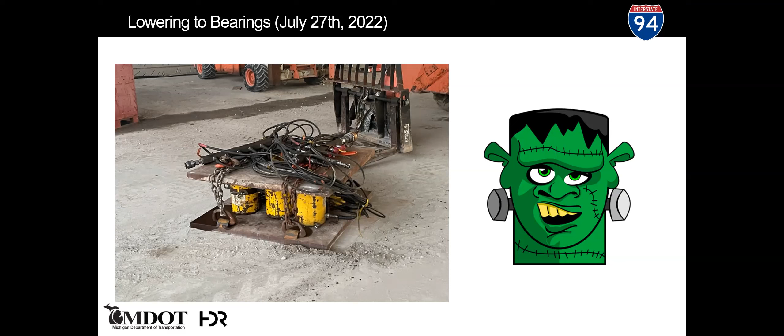So how do we accomplish this? How do we transfer the load back and forth one more time if our jacks won't fit? I'd like to introduce you to the Franken jack. At the last minute, this was the design—using 4 foot by 4 foot, 2.5 inch plates with six 200-ton jacks chained in between each set, creating the Franken jack that would fit.

It fit underneath the end diaphragm and allowed us to transfer load back and forth, layer by layer, until we worked out the last few layers of block.

On the right, you can see the bearings have finally come in contact with the sole plates. You'll notice it's a little discolored—the welds only go in the front half of the bearing, and on the back half we just wanted to make sure we'd sealed the area we ground. This was a design change; three years in, and we were still figuring out the bearing situation going into the move, so things were kind of in flux there.

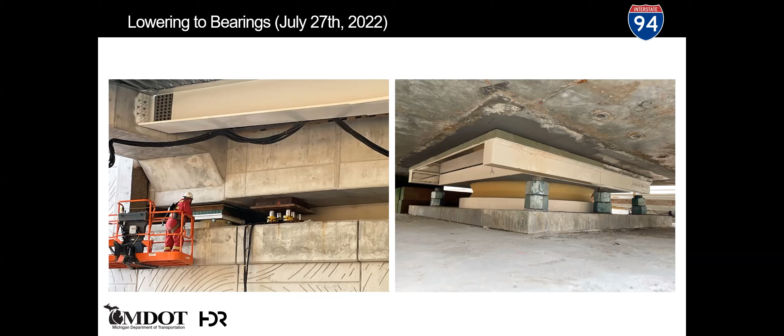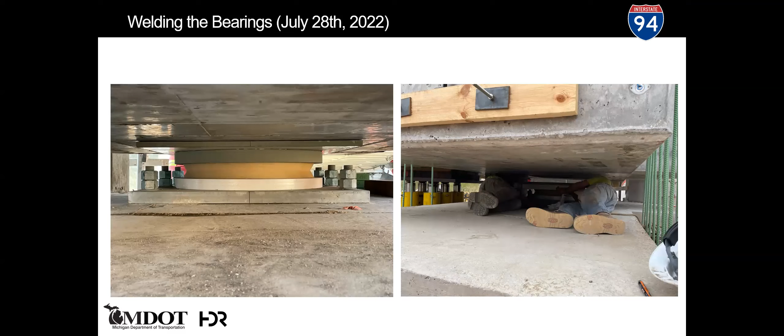So the last step was to find the skinniest welders we could to shove between the knuckles and the abutments. They were able to coat and paint the galvanizing, then weld the rest of the perimeter.

One thing everyone learned from FIU was that there were a number of phone calls that went unanswered, emails unresponded to, voicemails unchecked. We decided—and that all came down right as this project was being let—MDOT decided that was not going to be our problem. The people in that circle there are not just onlookers, gawking at the project.

What this meant was every time a decision had to be made, every time an adjustment had to be made, every time the red light came off, every time numbers came in from the total station or the monitoring system, everyone was on site in a group making decisions together. Until the entire team concurred, nothing changed. Once we had concurrence, a thumbs up was given - sometimes it was a different finger, but most of the time it was a thumbs up. We were able to advance the project and successfully achieve our goals without getting anybody hurt.

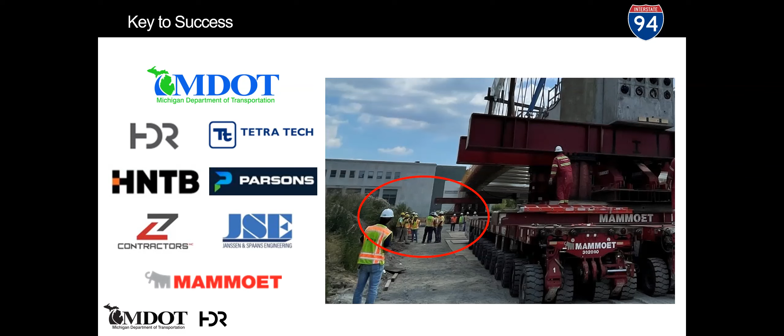Then last but not least, right before it went down, we took a moment for a photo op where all the inspectors and engineers gathered - you can see Matt and myself on the far right, Mike there as the first person on the left. We basically just signed this bridge so that when our great-grandchildren...

John, we're losing your sound. Yeah, hopefully you guys can still hear me. John, we started to lose you there right at the very end. Go ahead, Matt, just take it from here.

All right, well, that timed out well - that was just the end of John's section. Thank you. So just to try to wrap this up here, I know we're at the top of the hour.

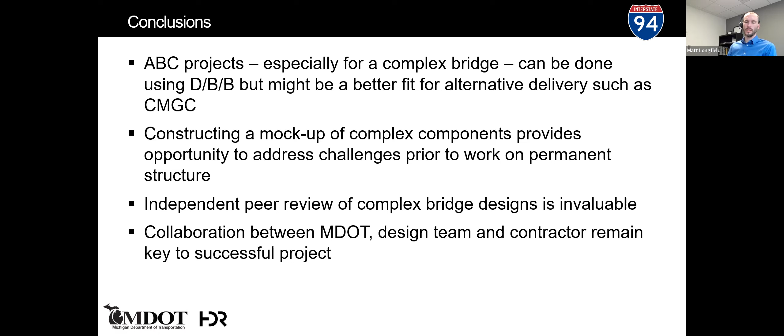And again, just that final point on collaboration - a lot of us got to be very good friends through this process too, but really credit to the whole team. Everyone checked their egos at the door, everyone tried to add value and really work together. Any idea was a good idea and worth listening to. I can't understate how valuable that was to the whole project.

So just to finish up, these are some aerial shots they were taking, from last fall right before the snow started flying. The bridge is actually open to traffic now, although it's not quite done - there's still some minor cleanup work that's going to happen once the weather warms up here in Michigan later this spring.

But you saw the renderings. Matt, flip back to that last picture. I just wanted to point out the recording studio and how close that really is to the end of the bridge. Yep, it's right here with the blue roof.

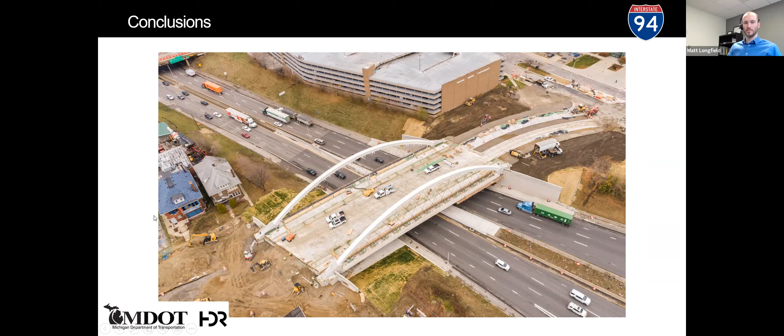So yeah, we showed the renderings earlier - this is what it actually looks like when it was all said and done. Once the planting season and everything happens later this year, all that nice landscaping and park-like structure will be completely finished.